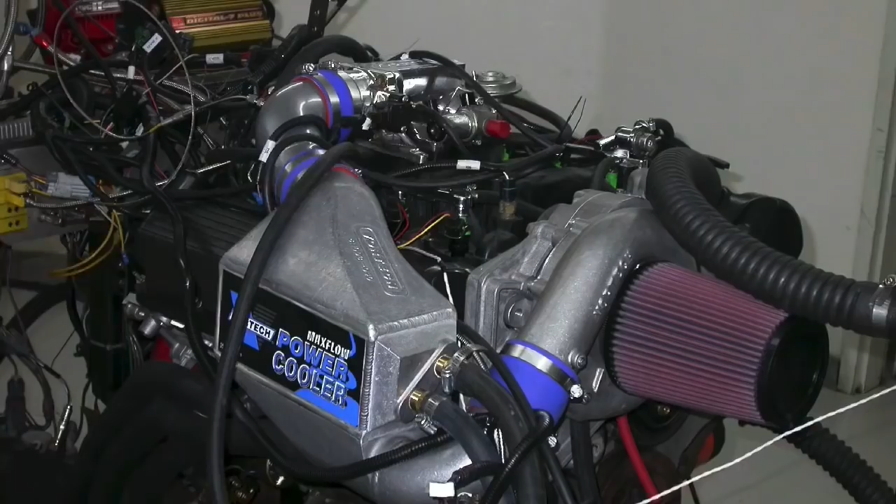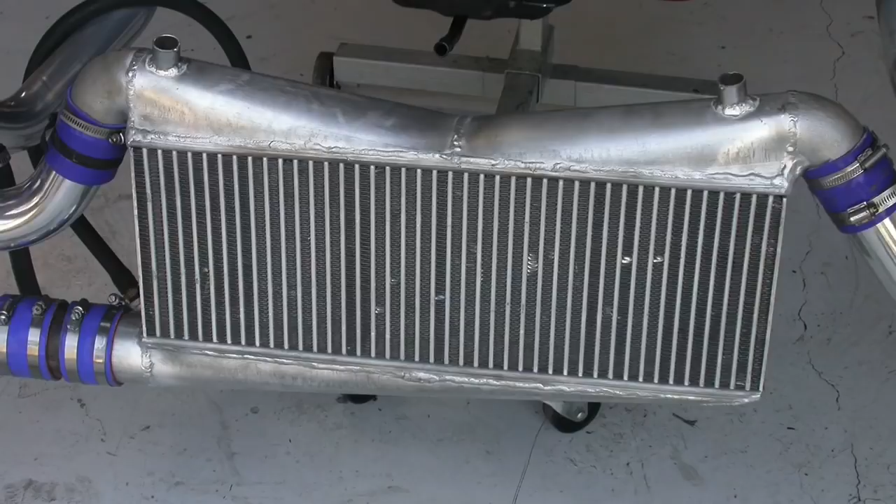Who wants to see a comparison between a Vortech centrifugal supercharger and a pair of twin turbos on a 4.6 liter 2-valve mod motor? Now actually, this comparison works on any motor. In this video, I'm going to illustrate a comparison between a Vortech centrifugal supercharger and twin turbos.

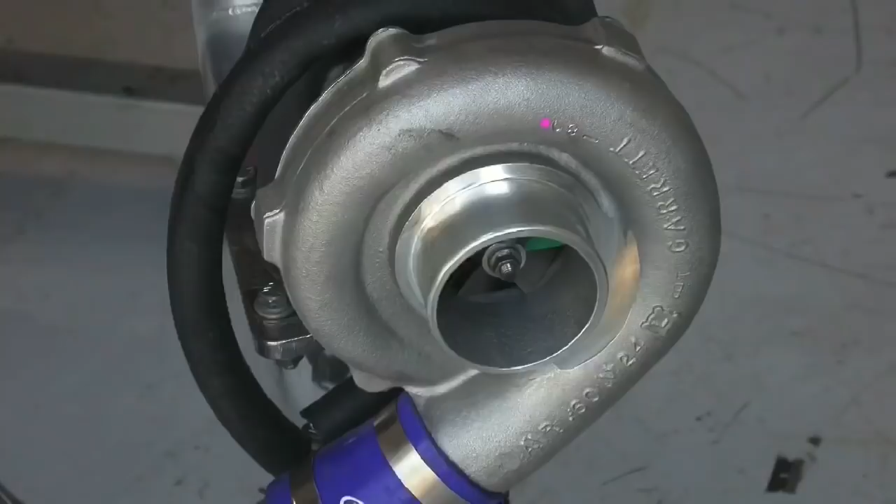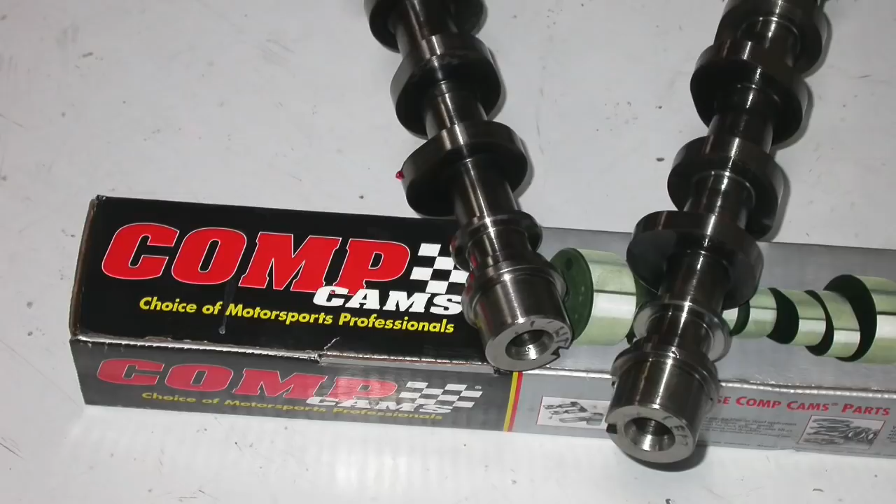In this video, I've actually got two different test motors, but they're very similar. Both of them were 4.6 liter 2-valve non-PI short blocks. Both had ported heads, aftermarket cams, and PI intake manifolds. One we ran with a Vortech centrifugal supercharger and an intercooler. The other we ran with HP Performance twin turbos and an intercooler. So how do the two compare?

Before we can get to our comparison on turbocharging and supercharging on a 4.6 liter 2-valve motor, we need to go over the test motors. Unfortunately, I wasn't able to run the Vortech and turbos on the same combination, but this should still give you a fairly good idea as a comparison between the different forms of boost, because the motors were fairly comparable. So our first test motor, I'm going to show you what the NA power did and what it did with the Vortech. Then on the next one, we'll show you what the NA power did and then what it did with the turbos. And then we can compare all that.

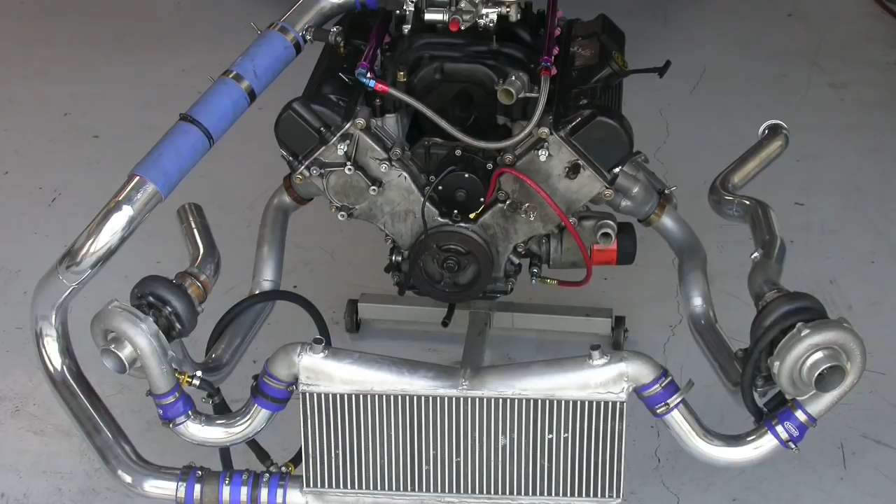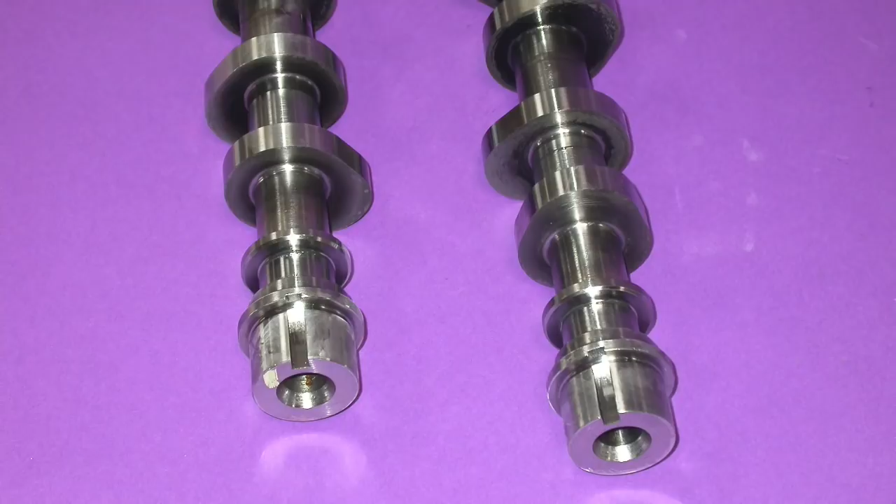So our first test motor was actually a hybrid. It was an early non-PI short block, equipped with ported PI heads. It had the PI intake manifold and the stock PI throttle body. We ran this with long tube headers, a FAST XFI management system, and started with a set of 36-pound injectors, eventually going up to a larger injector size when we added boost. This is what we ran on our naturally aspirated combination, and this thing actually did fairly well. Our naturally aspirated 4.6 2-valve with ported heads, the Extreme Energy 274 cam, and the PI intake manifold made 390 horsepower and almost matching 384 foot-pounds of torque.

But here's what happened when we added the Vortech supercharger. This was a kit that they sold back in the day, and I'll put the pulley sizes up here so you guys can get an idea how fast the blower is spinning. I believe this was an S-trim supercharger. It also had the Vortech air-to-water aftercooler, intercooler setup on it. And I can tell you that this thing made the power jump up to over 600 horsepower, 624 horsepower.

Peak torque was up to 544 foot-pounds. At this power level, this particular air-to-water intercooler core was probably becoming fairly restrictive. I didn't test the pressure drop before and after this core on this test, but we've run this same size core on 5.8 liter Ford applications, specifically on a 351 Windsor application, where we replaced this core with a bigger one and picked up quite a bit of boost and power. So we know at this 600-plus horsepower level, this core was probably restrictive. But this is what our combination did with a Vortech supercharger.

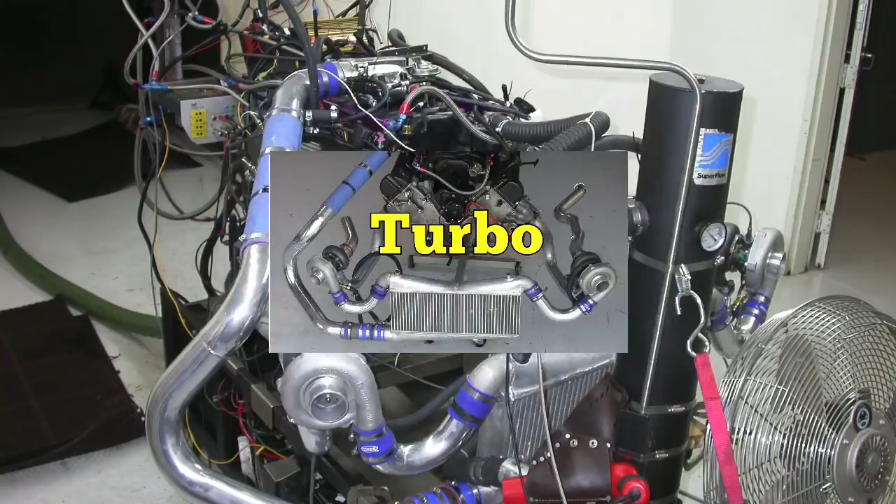So now let's take a look at our next combination, run with twin turbos. Our second test motor had similar modifications. It was actually also an early non-PI short block. It was equipped with ported non-PI heads, and these particular non-PI heads were from the guys at Ford Performance Solutions. They modified them to accept a PI intake manifold, so in addition to porting, they welded them up so they would accept the better PI manifold.

It had slightly smaller camshafts in this combination—the Extreme Energy Comp 262 AH cams, which had slightly less duration than the 274 non-PI cams we ran in the other combination, but more lift. They went up from .500 to .550 lift. So slightly less duration, slightly more lift, and both had ported heads and PI intake manifolds, but this one actually made slightly less power, and we'll show that comparison in just a minute.

It produced 365 horsepower and 372 foot-pounds in naturally aspirated trim. It was run with the FAST XFI, the same injectors, and the same long tube headers. And here's what happened when we installed our twin turbo kit from the guys at HP Performance.

It had twin 46mm turbos, a front-mounted air-to-air intercooler, and was running the exhaust manifold supplied with the kit. The turbos were mounted up front in the fender wells, with a big front-mounted air-to-air intercooler, and it worked fairly well. The system had plenty of potential.

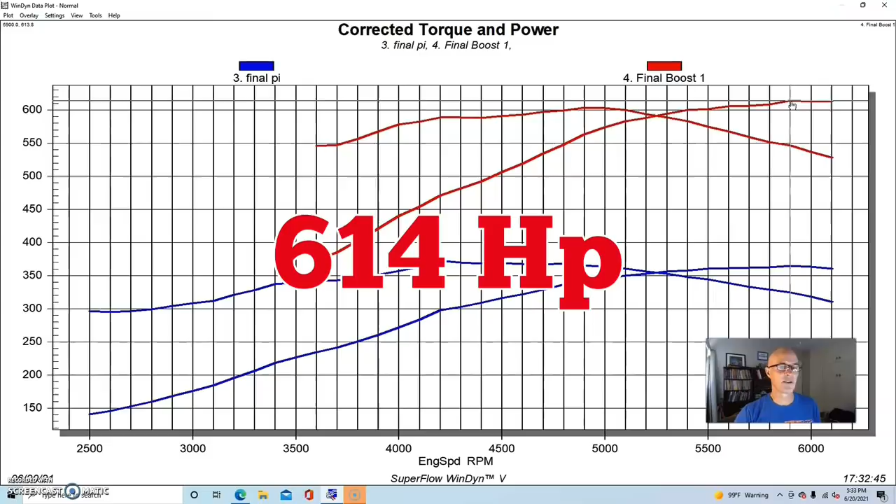This was easy power for this particular combination, run at about 10 pounds of boost. It made 614 horsepower and 604 foot-pounds of torque.

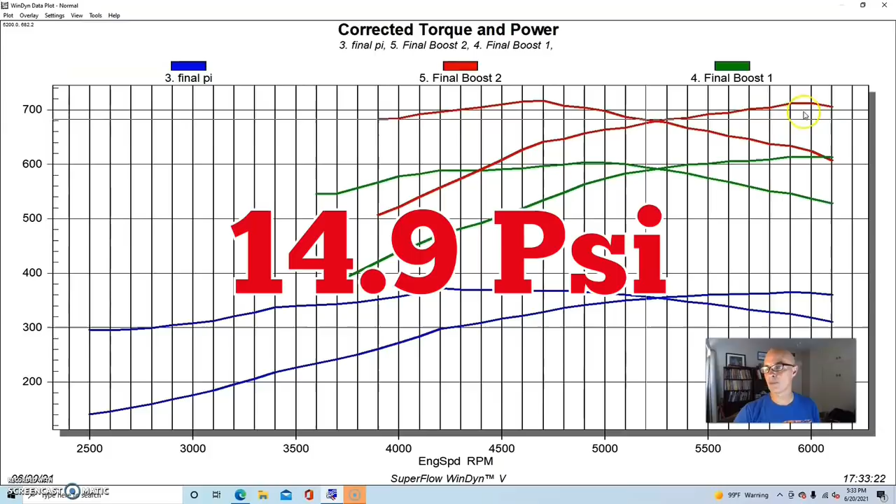Here's what happened after we turned the boost up to about 15 pounds, 14.9 pounds. Power output jumped to 713 horsepower and 717 foot-pounds of torque.

So now that we've taken a look at what the turbo does on this combination, let's compare the combinations. Let's compare the supercharged combination versus the turbo combination, both in power and boost level, so that we can understand the difference between supercharging and turbocharging on these two mod motors.

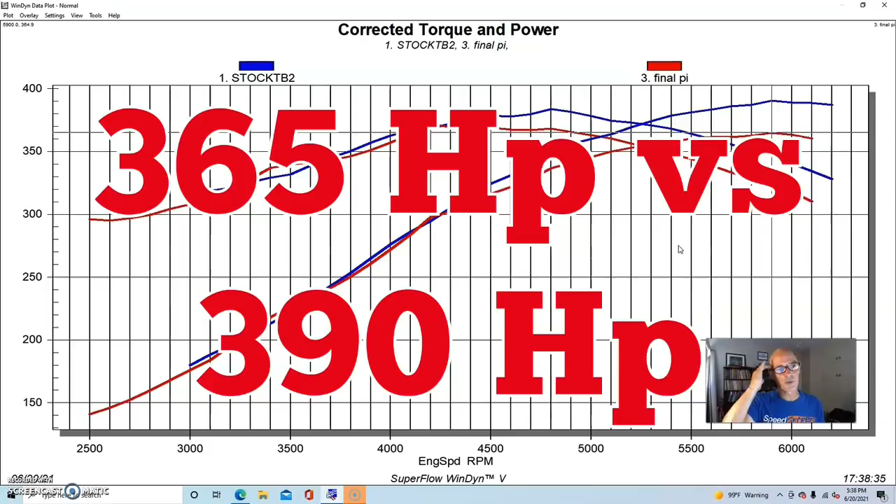We need to take a look at what the starting difference was for these, and let's take a look at the NA power outputs. This was our 390 horsepower hybrid, the early non-PI version with the ported PI heads, and here's how it compares to our second test motor. You can see that the hybrid version, with the ported PI heads and bigger cams, made slightly more horsepower than the second test version, which had the ported non-PI heads and smaller camshafts. So you're talking about 365 horsepower versus 390 horsepower to start out.

This is important because when we look at the difference between the turbocharged version and the supercharged version, it gives us a better idea. So let's take a look at that. Here is our supercharged version.

This is our supercharged non-PI hybrid combination with the Vortech and the intercooler, running at 11 pounds of boost or so. And here's what happened when we ran our first turbocharged version with the other motor, and you can kind of see how they compare.

You can see they're running similar boost levels. The turbo motor, and we'll take a look at the boost curves, is actually running slightly less boost than the supercharged version. But the important thing to look at here is how much more power, and we'll see this indicated in the boost curves as well, in red, the turbo version is making than the centrifugal supercharged version, because of the change in boost response.

In a centrifugal supercharger, it has a rising boost curve. So down here at 3,000 RPM, it might only be making a couple of pounds of boost, but out at the top is where it makes peak boost. Whereas the turbo, if you size it properly, can have a nice flat boost curve all the way across.

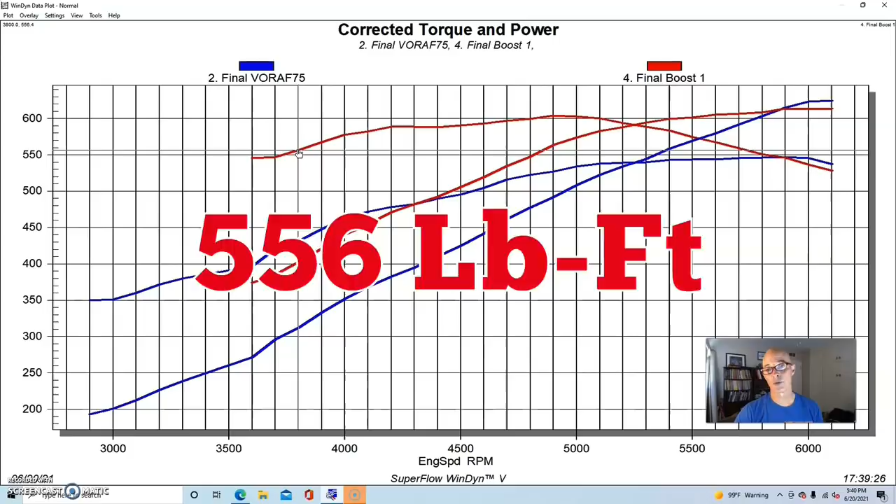So down here at 3,800 RPM, the difference in torque between the two combinations: for the centrifugal supercharged version, 413 foot-pounds; for the turbo version, 556 foot-pounds. And again, we'll see this when we take a look at the boost curves.

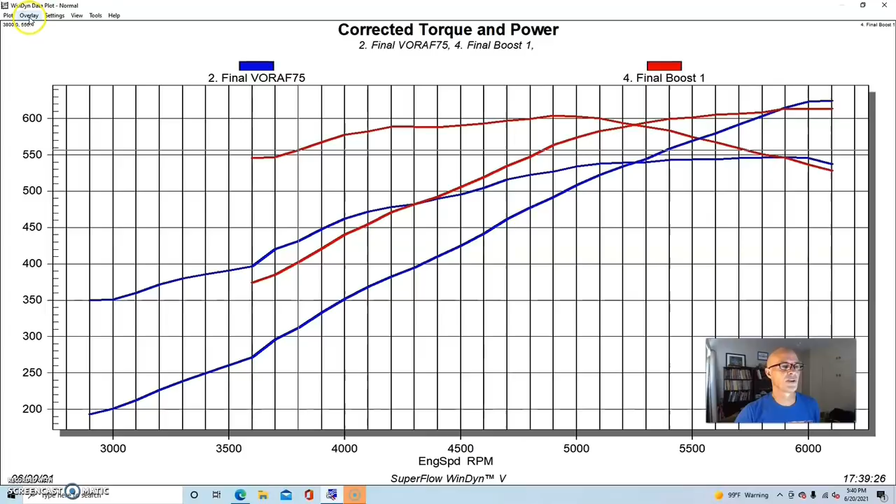Obviously, what we did with the turbo version, which is a little more difficult - we could change the pulley on the Vortech, but it was very easy to change the boost on the turbocharged version because all we had to do was adjust our manual wastegate controller. And when we did that, we see a whole bunch more power, over 700 horsepower, and way over 700 foot-pounds of torque on the turbo version. So there's plenty of power left to be had there.

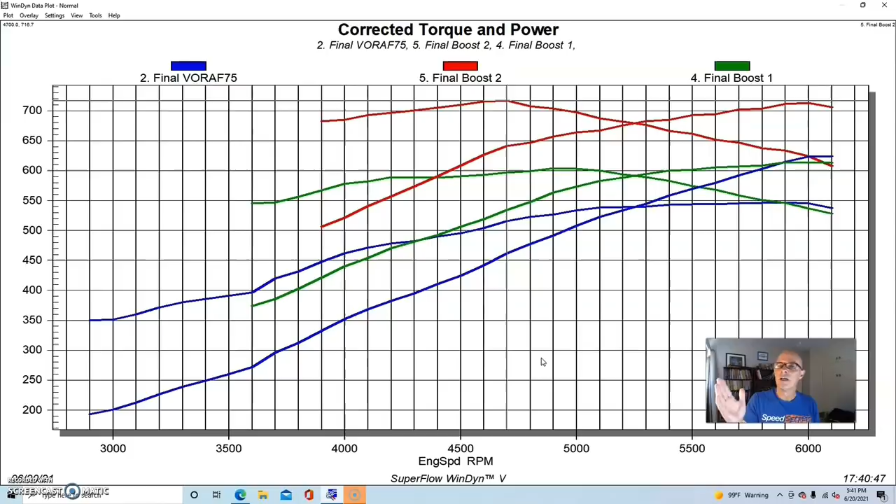As I said, I think the intercooler was probably a little bit restrictive on the Vortech combination. But now let's take a look, and maybe if I get rid of these, you guys can get a better idea here.

Let's get rid of torque. You can just see these are the horsepower curves. Blue is the Vortech, green is the turbo at 10 pounds, and red is the horsepower of the twin turbo at about 15 pounds.

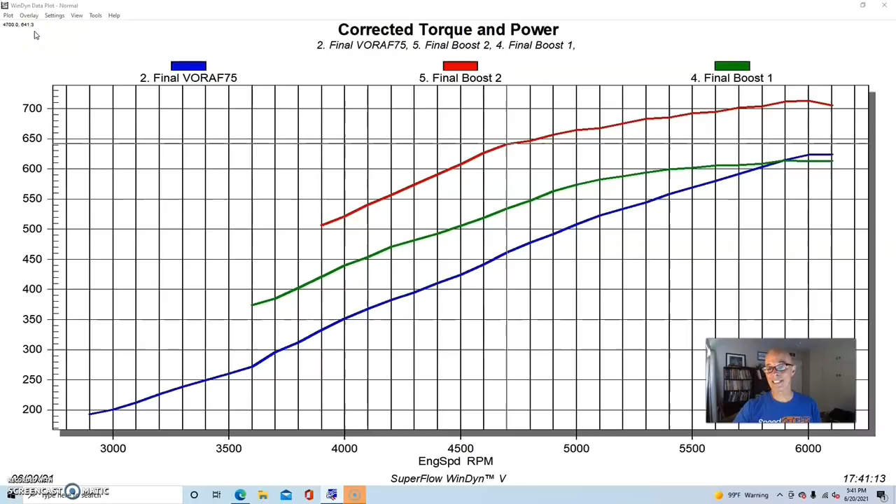Now let's take a look at our boost curves, and you can kind of see why they're doing this. To illustrate why there's such a big difference in the power curves offered by the twin turbo setup versus the Vortech setup, we only need to look at the boost curves here, and this will show you what's going on and why the turbo combination made a lot more average power.

It's because it makes a lot more average boost pressure. This is the boost curve offered by the Vortech Supercharger on our hybrid version, the non-PI short block with the ported PI heads and the 274 cams.

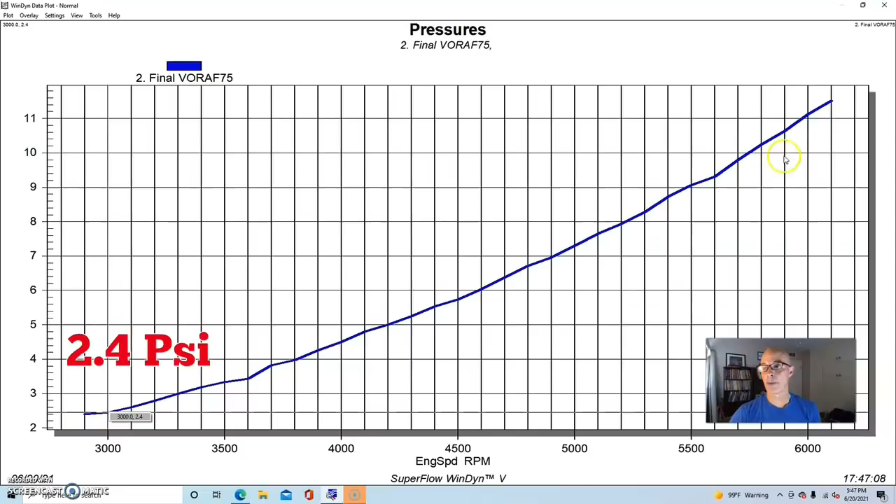At 3,000 RPM, it's starting out about 2.4 pounds of boost, and doesn't reach 11.5 pounds until 6,100 RPM. By comparison, here's what the twin turbo combination looks like.

Much flatter curve. We started this thing at about 3,500 RPM, where it was already making 9 pounds of boost, and it had a slight increase to just over 10.1 pounds. The interesting thing is that where the crossover is on these two, where they started making the same boost, was 5,750 RPM.

At 5,800 RPM, despite the fact that the Vortech was making more boost than the turbos were, this turbo combination was still making more power.

It's important to note that the NA power output of the turbo combination was also about 25 horsepower less than the supercharged combination. So it was starting out as a deficit, but yet it more than held its own and in fact made a little bit more power at the same boost.

So if it were starting out with that extra 25 horsepower, the difference between the turbo and the supercharged combination would be even greater. At the same boost, the turbo combinations almost always make more power because they don't have the parasitic losses associated with driving a supercharger.

That doesn't take anything away from the Vortech. I ran a Vortech on my 5-liter Mustang for years and years and loved it. It was fantastic. The difference between having an NA motor and a boosted motor is dramatic. So the Vortech works good.

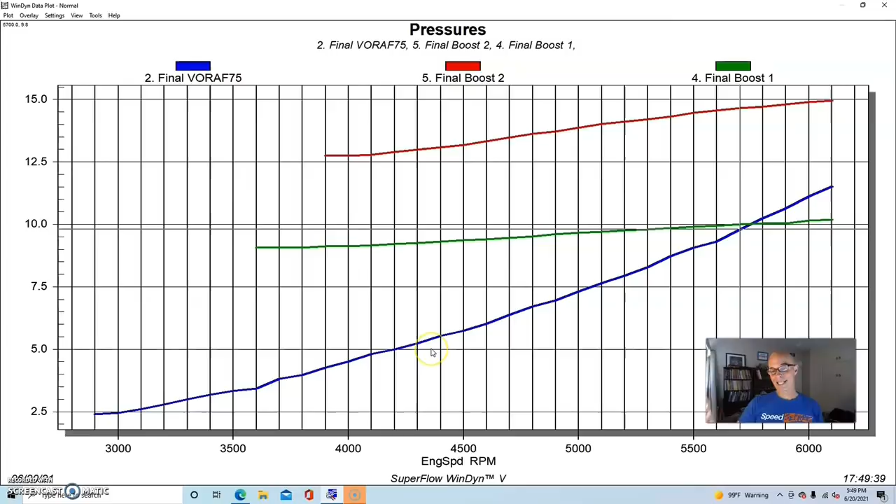We had a slight rising boost curve when we turned the boost up to a peak of 14.9 pounds. It started out here at 12.7 pounds and rose slightly up to 6,100 RPM. So again, turbo stuff has good average power production because it has good average boost production.

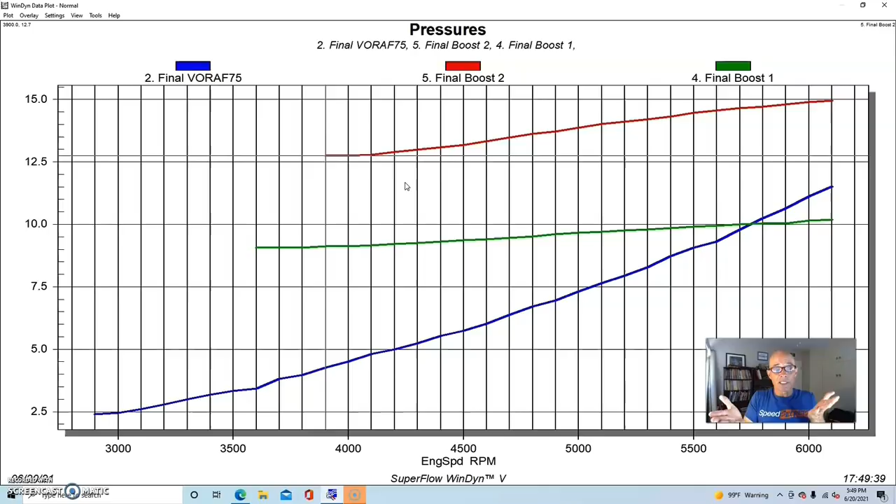Let's get to our conclusion. Okay guys, what do we learn from this comparison between the Vortech Centrifugal Supercharger and the twin turbos run on our pair of 4.6-liter 2-valve mod motors?

Here's really the takeaway, and this is usually what happens. If you compare a supercharger to a turbo, it could be twin turbos or a single, they're both going to do the same thing. The turbo will typically make more power at any given boost level, only because it doesn't have the parasitic losses associated with driving the blower.

The faster that you spin the blower and the more boost you're trying to produce and the more air that you're processing through the blower, the greater the parasitic loss. So at really high boost levels and really high power levels, there's even more of a loss on the blower stuff. But that's not really what's important here.

What I really want you to look at is the difference between the boost and the power curves. Take a look at why one of them offers a lot more average power production.

Now, I love the centrifugal supercharger I had on my Mustang, and I drove it around for like 80,000 miles, and it was fantastic. But if you look at the boost curves, you can see the centrifugal has a rising boost curve, where the turbos have kind of a flat boost curve after the turbos come up.

But when they're making 10 pounds at 3,500 or so, they're just going to offer a lot more torque than the centrifugal does. But here's really the key, and here's the takeaway.

I like having all of these to choose from, whether it's a centrifugal, turbos, positive displacement, roots blower, all of those things are great. They all offer different things. And really the key here is that the difference between having a naturally aspirated motor and a boosted motor rules.